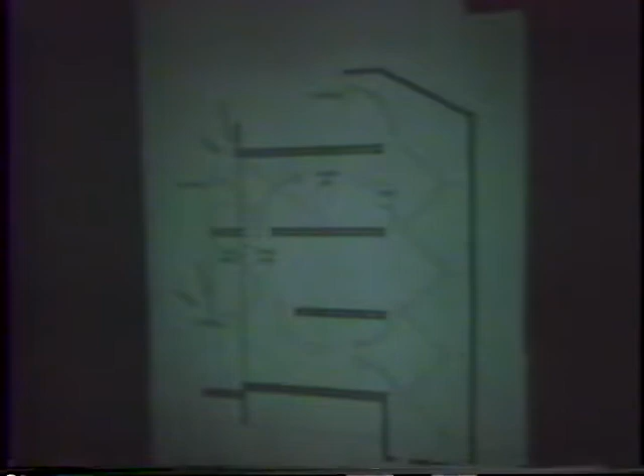This is where you can look out through the second level of glass. But in analysis later, we realized that we had actually created a pretty good heat trap, that the wind would blow actually on this face. You would get less heat loss at this point. We were still protecting from summer. We were letting some winter in.

It was a high volume area. It also had a loft that was not used that often. It was one for their sons when they came home. So I had extra high volume. And so what I started to find was that we had probably a good circulation pattern.

Also, there's a fair amount of radiation that takes place from the heat that stays up at these areas prior to the great change in temperature. There's also a convection current that starts to work usually down the glass face later in the evening.

So when it changes, we added the element of rock storage with the idea that actually that wasn't really in there, but with the attitude that if you took the process, you could bring the heated air down. You could also store it and bring it back later. The cooling process, of course, would happen by just the chimney effect of allowing the heat out on a very hot day. So without consciously doing it, in many ways, I think we had designed a very energy efficient place.

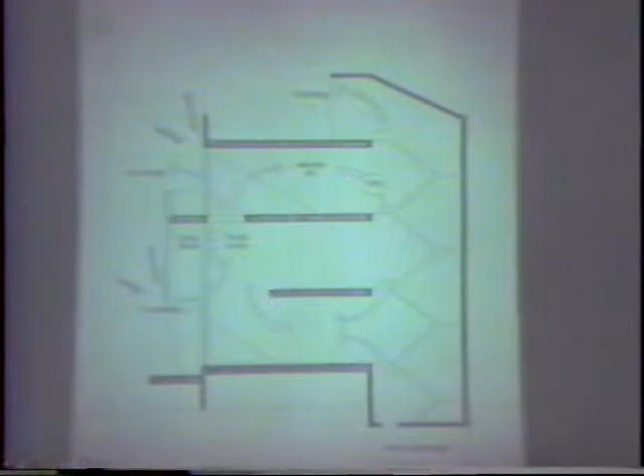Again, on this job, when I say we, Claudio Boccato was the architect who followed through and through supervision and worked to some degree on design on it. I don't remember who else in the office did. I think we two were the only ones on this particular job.

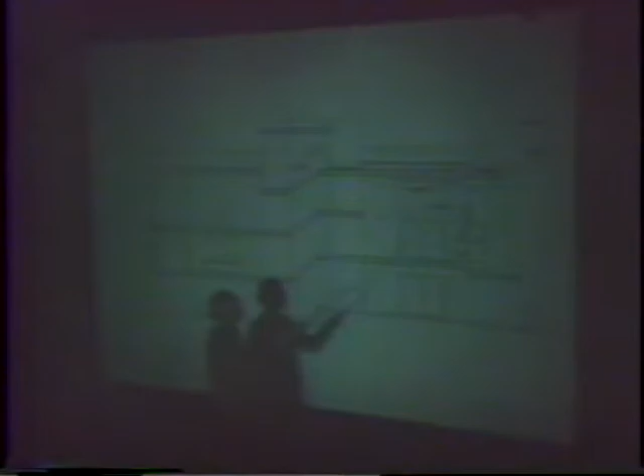So then I'm showing this section. This was another house, the stone house, that was very effective heat-wise. And what it did was what I was explaining before. There was enough overhang to cut out the summer, it let winter sun in. Because of high volume, the heat stays up top, so there's still a comfort zone in the lower area. And there's a lot of heat that's gathered at the ceiling, and that radiates later in the night.

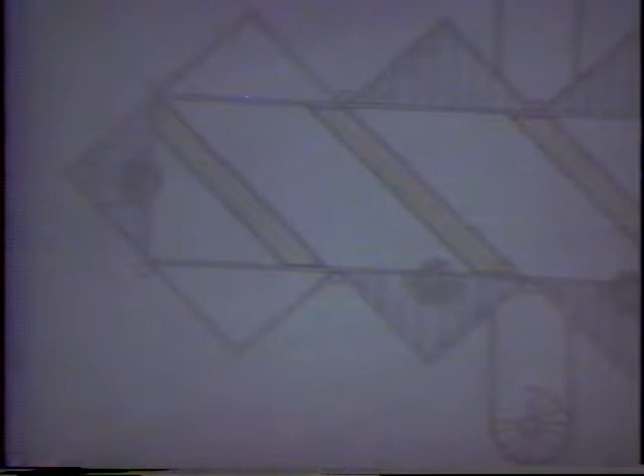Sun was coming 45 degrees south to this area, so the solar collectors are tilted, and greenhouses were added to the side. I'll show you further; in concept it would be this. This is the sun location. These are greenhouse areas, and these are solar collectors.

Now this client wanted fireplaces practically in every room, and this would, again, be good from an energy standpoint as far as burning and so forth. I needed mass in the greenhouses, so in this case I used a water mass filled fireplace. In other words, I used a metal container with water in it and used that method of collecting my heat mass that would then generate into the house later.

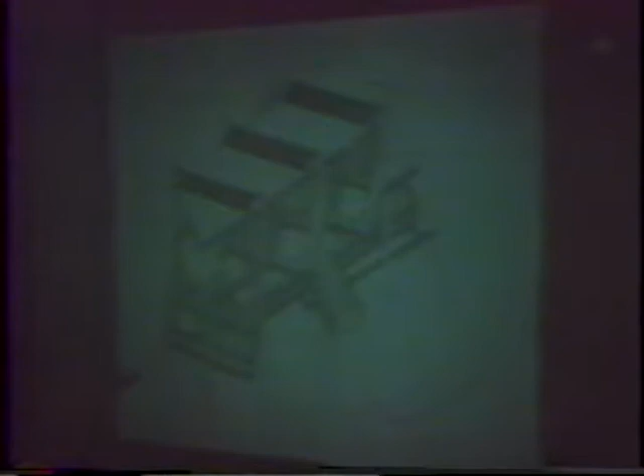The yellow circle over there was another one in which we were collecting the heat from the solar collectors and storing it in that container and then bringing it back in afterwards. In isometric, you can get a better idea of how the house works. And then as an energy use, this explains what I just explained again, the sun coming into the fireplaces, methods of closing the greenhouse areas afterwards, and heat moving through.

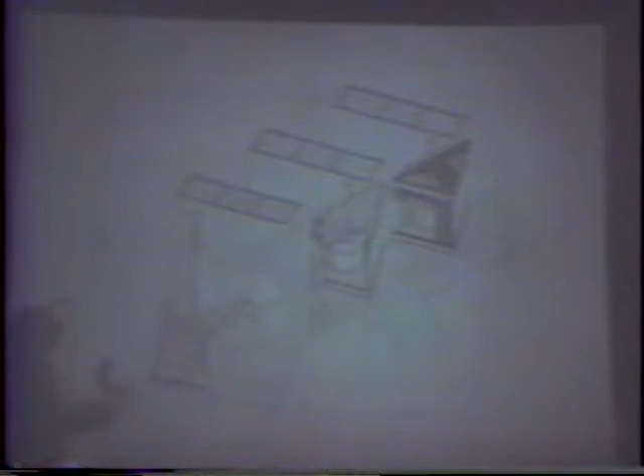So again, it's a fully glass house. It's not much different than many of the things that I had done before. The north side, this is again in model the same thing. We used a dark container for the areas that would collect in the water storage in the fireplace areas, and a yellow for the one that was working the other way. And all the north side was pretty much solid and closed. So it's opened up to the south and to the southwest and closed to the north.

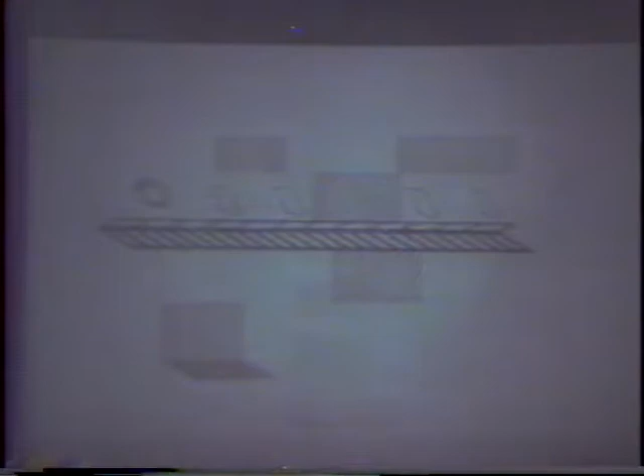Solar collector along here, storage here, and a series of, in a sense, greenhouse areas. In this case, it was using floor mass, which was tile in most of those areas. Further diagram showing various kinds of closure systems as well.

Another house. In all these last few houses, the one before and this one, Manuel de la Iglesia worked with me and did many of the drawings and some of the models for my presentation over in the gallery.

This one was an interesting one from a standpoint of client need, and in all cases I always feel wrong when I present, because I forget about the fact that in each case naturally the client's needs, the site needs, the kinds of space perception, all of these things are key factors. Structure is still an important thing to me, and so are all of the other systems.

So my method of design is always a composite of all of these things as well as I can do them. And I don't deal too much with just formal issues in the sense that they're being used today. You can still say that certain diagrams, certain patterns are certainly formalistic in their ways and their geometries, but they don't deal so much with elevation as they deal with plan, section and systems.

This one, the client wanted a house that when they were away could be used in one section, and when they were there, they could use the back section. So actually there are, in this one, two circulation patterns. One that takes you up through here for this part of the house that they were going to lease out. The other was just a system for their back part of the house over here for their bedroom when they were there.

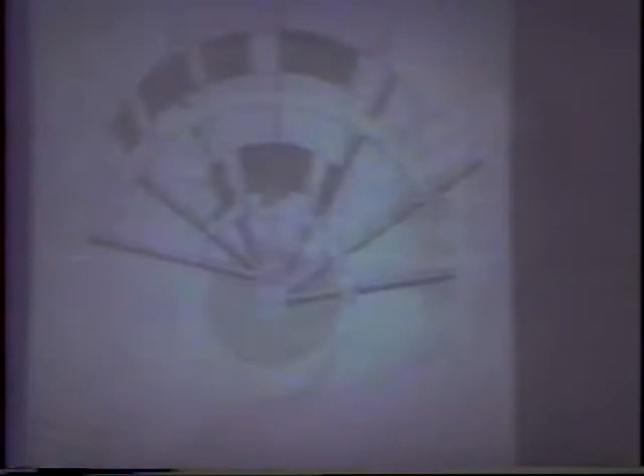And then this is a diagram of that system that I just expressed.

Is that focused well enough? That looks a little off.

But then again, this is just showing the working parts, the collecting parts, coming into this place, heating water and holding this, gathering sun, and then distributing back through the house, through the structural system and mechanical system combined.

Now, in many of these cases, like in this one, which didn't go any further than design phase, much of this was not worked out beyond this. So this would be a concept for an idea that may or may not work totally.

Usually, whether it be a structural concept you have, or a mechanical concept, or a solar attitude, or an energy attitude, the architect's role, in my mind, is usually to project ideas or attitudes that can be used, and the engineer or the consultant's role is to make those things work for you or tell you where you're wrong, have you go through the adjustments that take place.

But if you don't project first, it's a rare engineer, although we have one sitting in here tonight, Saul Golden, who will give you something before you ask for it. Usually you have to project things first.

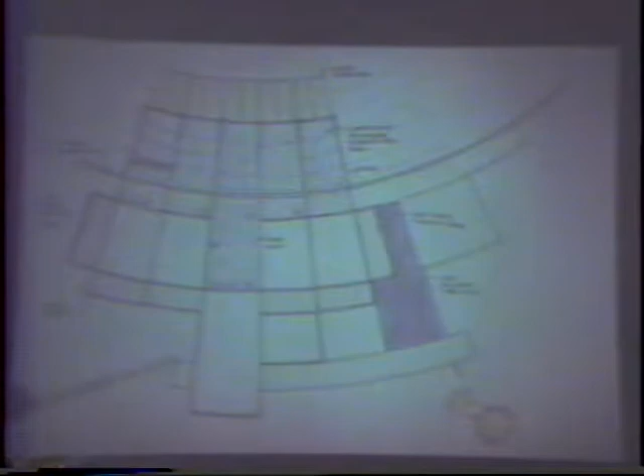Another one that we're working on will be going into construction soon. The one prior to the one I just showed will also be in construction soon. We've been held up with a geological problem for quite a while. This one should start quite soon. This was interesting because if you can follow the contour lines, this hill took exactly this form.

And normally in an area like this, it's a rocky kind of a mountain slope. And when I saw that, it seemed to me that it would be nice to be able to use that for the mass, if I could close it with a greenhouse enclosure. The problem that you normally have in something like this is the city wants you to stay away from the toe of the slope by X number of feet, or develop a retaining wall if you're pushing back tighter.

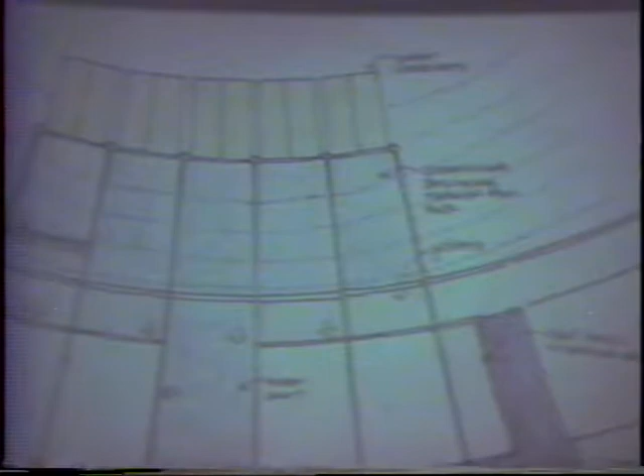Along with what I wanted to do, I also worked out a system that would allow me to cover the hill and get away with going all the way back to the top of my slope. So in a sense, by just having thought about how I would deal with the energy issue, I was able to gain a much better situation as far as the way it would work with the slope, and not have to give up that back part of the site. There's a view site to the ocean that moves out from there.

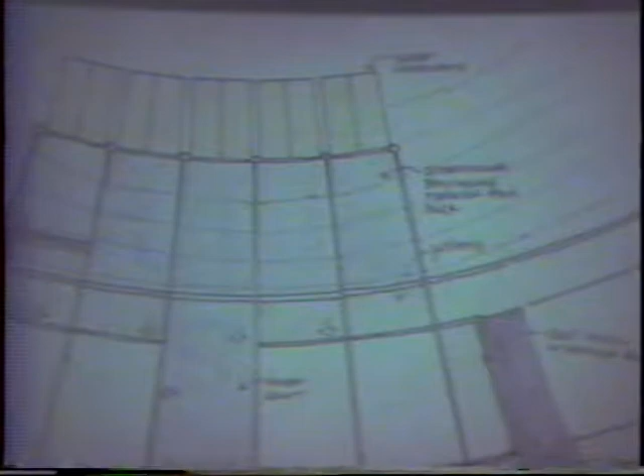So again, the energy proposition here is collecting at this point using a galleria that's closed off, and then at night opening the doors and letting the heat penetrate from the closure here, then going back and closing the greenhouse later. Out here there's a series of trellises for east sun and south sun and so forth that will help protect from south sun. So that's that diagram.

I don't know if this one reads, is that too light? It's difficult, but again, this is the system, the greenhouse system, the heat shown coming into the house, and that whole process. And then a solar collecting bank up at the very top of the hill, which goes right up to the property line.

This is that sloping bank. Actually, what we did in this one is we're setting piling, and then we're spanning between with a little wall that creates the wall at the back part of the site rather than down at the bottom of the site.

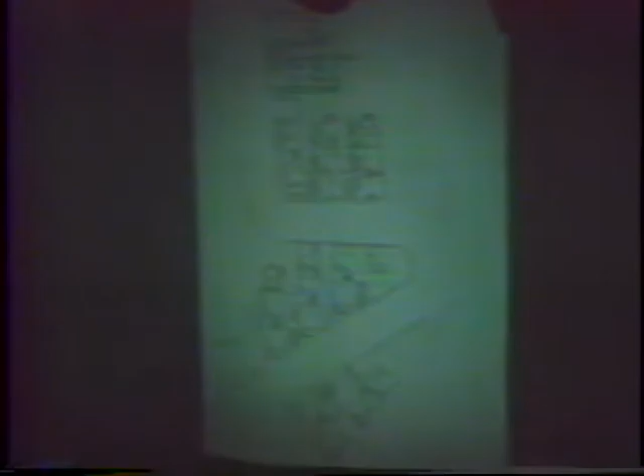Another interesting problem we had that, again, didn't finally go ahead because of the city changing their restriction on the street width later, that made the site almost impossible to deal with. It was in the Beverly Glen area. And Beverly Glen years ago was cut up into very tight little lots, about 30 feet wide by 90 to maybe 100 feet in depth, sometimes a little bit more.

And when we got into this particular problem, our option obviously would have been to collect it and do housing with joined walls and so forth. But in order to do that, one would have to go through a whole planning commission development and get an okay through that process. And we decided that we would just use the sites as they were and see what we could do with that.

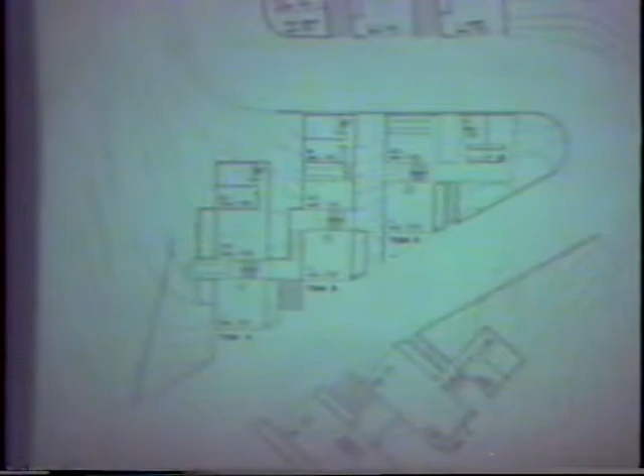And of course, they were oriented in a whole series of different ways, and I didn't have the option that we normally had on many of the sites to make turns and twists that could get me to the south sun in a special way.

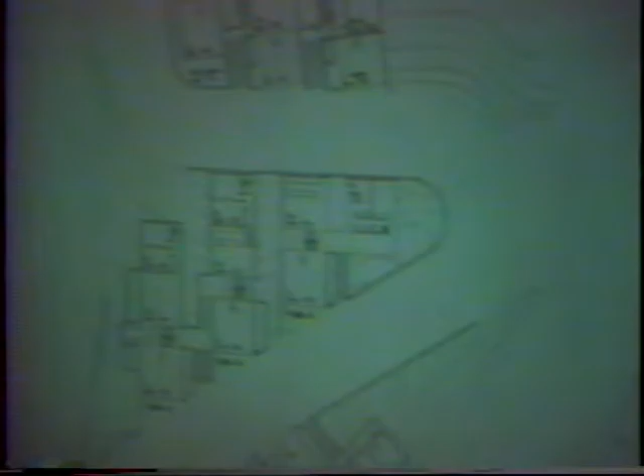So in this project, Bob Locke, who's here tonight, worked a great deal on this, and Manuel also. We decided to, one, just develop a series of very simple structural boxes that would fit on these particular sites and work in a vertical sense, and they would fill the site as shown in this model form.

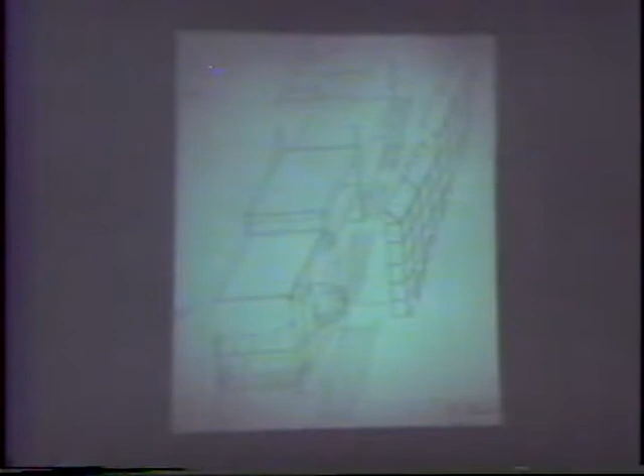And then we devised a system where we would actually add components, and the components would be added in a fashion for sun control, for allowing sun insolation, sun protection, etc. So there's a series of screens, awnings, overhangs, glass-walled attachments, and so forth. And this way we could actually dress each unit as we had to make it work energy-wise. In some cases it would be awnings. If we didn't have enough room on the side yard, we would use a tight-fitting system and so forth.

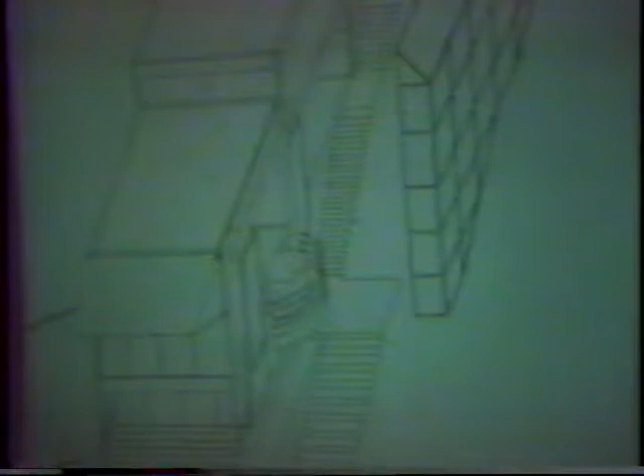So again, we didn't get a chance to really go through it, but I think the process was an interesting one, which was dealing with the idea of privacy, at the same time getting the best, most efficient energy usage that we could develop. And that project, we'll probably try to use that again at another point in time if we had a similar situation.

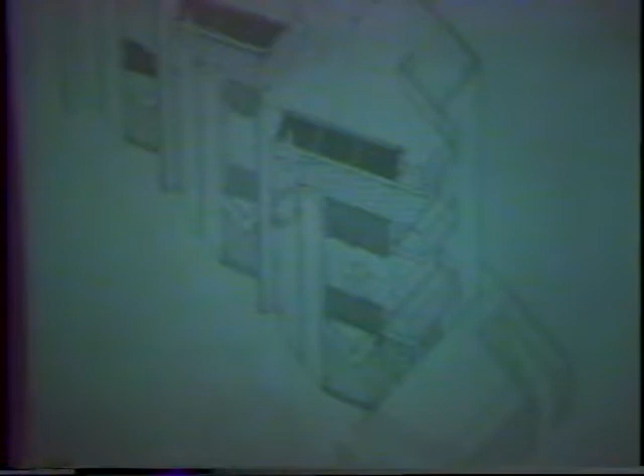Another project that is still in the works is a 3-unit condominium down in Venice. And again, this one was dealt with in a way where it was twisted in order to gain south sun. It also went with the alley in this face.

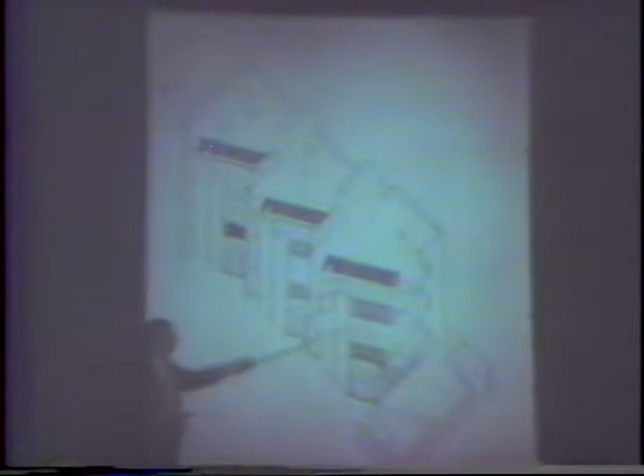And as it went up in section, what I decided to try to do on this one, since it was down at the beach, was to hang over the railings a water-filled, what would you call it? These plastic rafts that you use in the water, and just hang those for color, keep the water, and use it as a system of lighter weight mass. So again, this was a set of ideas that still haven't been tested, whether they'll work or won't work. And again, these are the forms that come out of that.

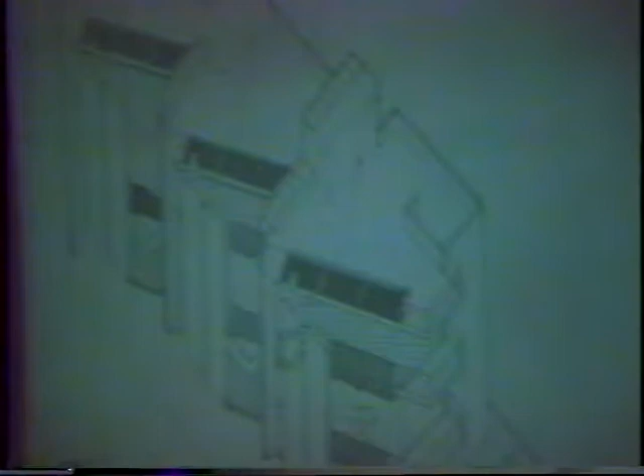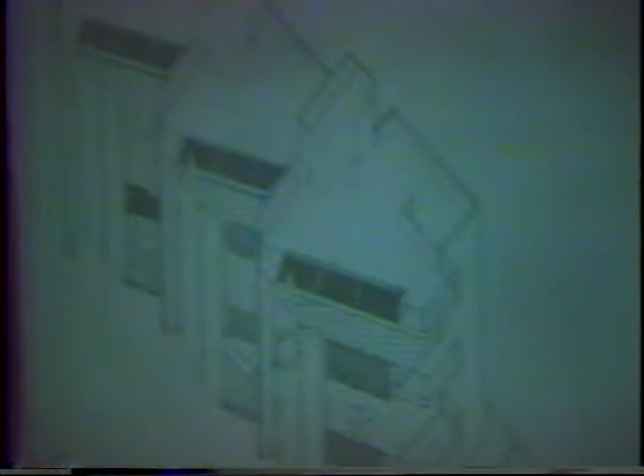In this one, the views were very tight, and so some of the pulling around the corners and in these areas was to get specific views out. This front corner had a view through, but it was on the other side of the speedway, and all the sites are rather specific. Again, most of my owners always want maximum glass. That's, I guess, what I'm known for, and so whatever project I get, nobody ever comes and says, give me a closed-up house. They're always looking for maximization of glass area.

A different kind of a problem, that we also have to face periodically in energy response, are those that are really the non-house, or the ones that are subgrade or semi-subgrade, where you back your north side into the hill, quite often cover surfaces with a turf afterwards, and kind of minimize some of your openings. This was a project for Charmlee, which is a county park, and it's been so long ago that we did it, I forget what we called it. It's a little building for people to come in and look at the various natural aspects of the park that are on display. Little nature building.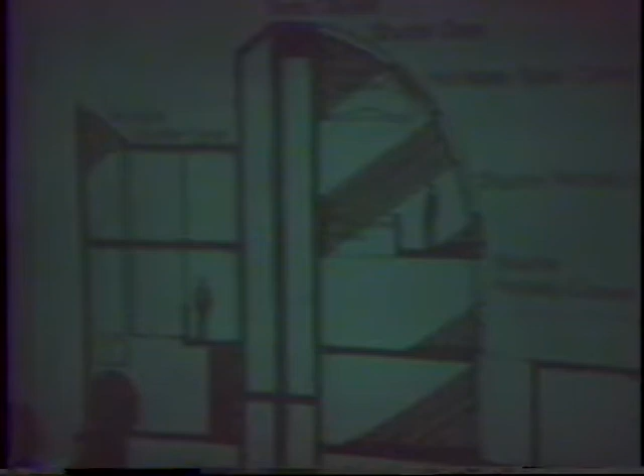So the idea here was, again, solar collecting at this point, allowing the sun to come in against the wall at this point. I show people here to show that what we're attempting to do is we would protect the system from this point, allowing the sun into here, so that at no time are you really into this whole hot area. I'm very concerned always about low spaces where there's a lot of sun gain. So if you use a lot of glass, I always feel that you have to give a lot of volume so that you don't have the sun on top of your head.

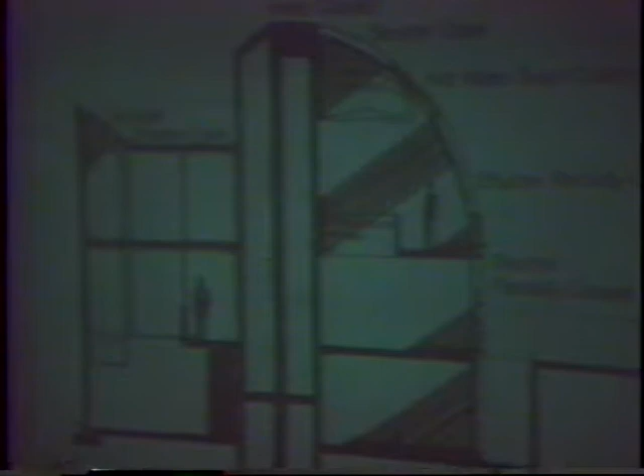So anyway, that's the system, the shutter system up, the shutter system down, and this heat process that comes down in here and then recirculates later, and this later in the evening throws off its heat. So again, one of the problems that I'm having after all these years is that none of these jobs are really up to be tested, and the difficulty is that when you're dealing with things as I do empirically with general principles, you don't know for sure if they're going to work until you've had a chance to see what happens. You don't really know whether what you're trying to do makes as much sense as you might think it should. Particularly when we looked at houses earlier where the concerns were not these concerns primarily, and we were getting fairly decent results. So the hope would be that these would be successful in terms of what one was trying to do with them.

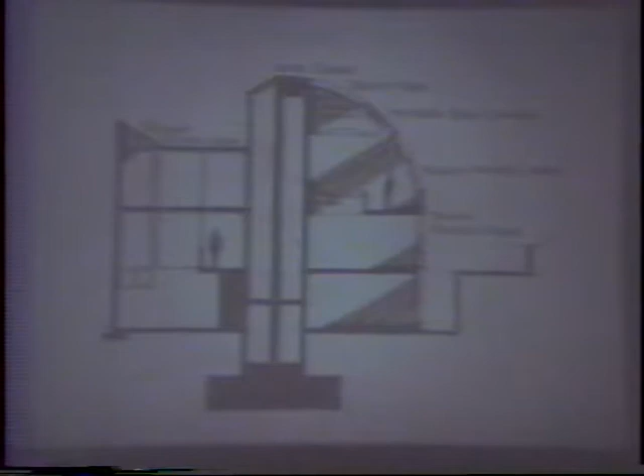The house as it stands from the back side. And the total shot again. Again, still working with sites somewhat dug in. On the Bourget house that I showed you before, part of it is dug in, a lot of it is exposed. This is a site down in Santa Barbara that's a 45-degree sloping site.

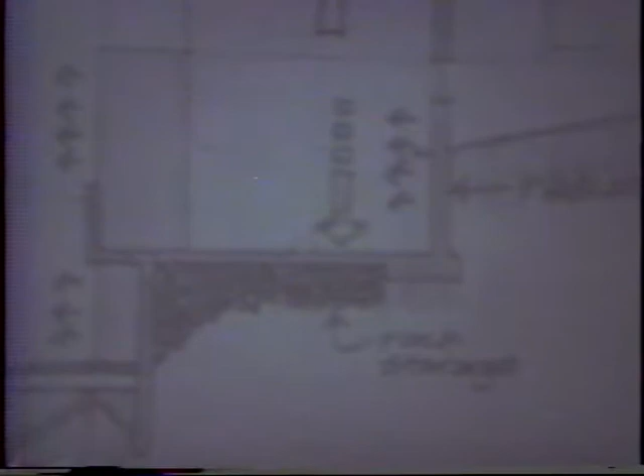And in this case, again, I decided to use some of the existing hill, which is rocky, some water storage in this sense, make a greenhouse out of this bottom section, use the same kind of roll-up and roll-down devices that I was talking about before, once you collect in here to close this space off, a system of generating the hot air afterwards, a rollback awning process to protect this face or let the sun in, whichever we want to do. Everything in the purple color always in these drawings is the mass part, some rock storage at this point.

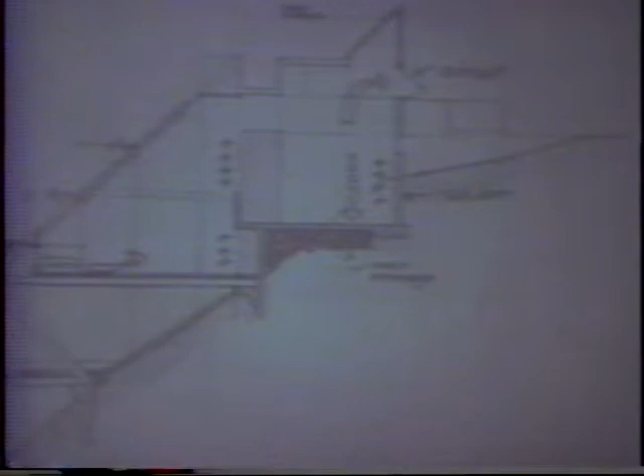So I'm showing the heat coming off the mass, showing this heat moving up through this portion of the house. Again, we're going to try to collect up at the top and pull that down into rock storage in this area. Solar collecting up at the top, exhausting up at the top, and fairly much the same principle as before. The house is somewhat designed as a truss on this face, which I'll show you later, with a concrete portion to sort of stabilize it at the back end. Again, a combination of a structural system, a volumetric system, and a heating energy process. It's on a south-facing slope.

So this again shows you the greenhouse, the house as it exists up at the plan above, the mass points that I was showing earlier, and also the way it addresses the site, which is I have to come in from the top side, swing around through this to get to the garage area. So I spun it off to get in from that point.

I still wanted to face south on my major facing view side and energy side, so the house takes its moves that way. Again, I prefer these kinds of turns and moves when they're meaningful, rather than just as an attitude of change for change's sake. Not that that doesn't work quite often the other way very well and gives you those forms. I just, for some reason, usually need a reason to make my moves. I enjoy doing it that way more. It seems more meaningful to me through that process.

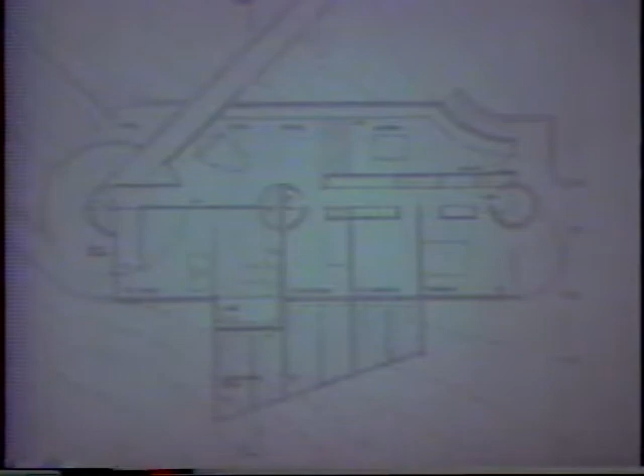So the sketch of the house. This house, the owners are going to build themselves starting this summer, so it was designed quite a while ago, but it's just going to get into construction. He's a retired junior college teacher, and I guess he's going to want to spend the rest of his life building a house.

But they're wonderful people, wonderful clients. Most of my clients, I feel, are wonderful people. They're very, they're great.

On this house, again, the north side and the northwest side are fairly much closed, and the south side is the open side. What I was saying, the mass, this part is the mass holding the house, and then that truss playing off of that form. Also kept this one below the top of the hill.

I had designed a house for another friend of theirs nearby, and we put it on the crest, and I didn't realize how windy the area was, and they had a fair amount of problems with the wind coming from the canyon on that side. I assumed, because we were facing to the ocean, that the winds would be gusting up from below, but instead they actually gust from behind.

And so some of the considerations here that I'm still a little concerned about in talking with the engineer is the kind of negative pressure that'll be built up on the glass face because of the wind coming up over the top and developing that pressure. Their feeling on it, however, is that when you're designing for your positive wind pressure, your negative won't be any worse, so that it should work okay.

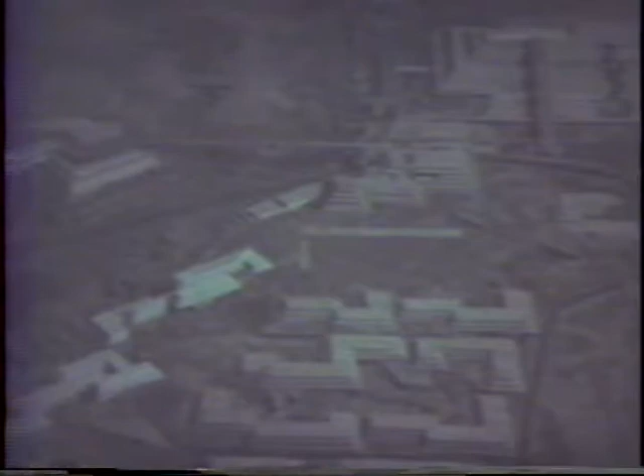Then just in terms of a larger scale project, and this one dates back to the early 70s, but it was sort of interesting to me as I've looked through some of the things we've done over the years. This was a new town during the days when new towns were very much in, and people were attempting to design new places for larger numbers of people. This one was actually a small one for about 10,000 people, and it was actually connected to a company. It was somewhat of a company town, a research city, and there's some research area that goes off beyond this.

But what was interesting to me in the design was that on the downs, we actually had chosen all the south downslopes, and most of these back areas are all, again, dug in with the car parking really behind and the apartments out forward, or the housing out forward. And the circulation spaces are these units right that come down through it perpendicular.

And the interesting thing to me was that in a unit of this size, in order to make it self-sufficient, probably the same kind of systems that I was using on smaller houses now, of using circulation, which was south-facing, for photovoltaics or for solar panels, would probably collect most of the energy. There's water down in here. I guess we could do a certain amount of storing using it as well. We were damming at that time, more for visual purposes, but it could have other advantages.

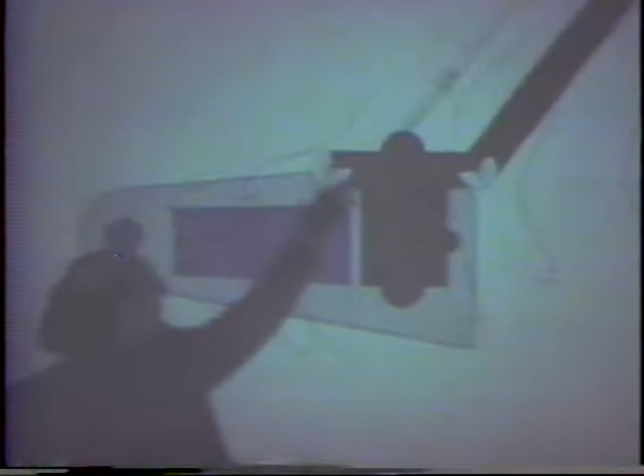Now move on with, again, another kind of a group that's somewhat different from the others. This one is a project that I worked on with Dean Noda primarily in the office. This job was on a very, very rough site. There's actually a valley that breaks through the site through here.

The point right up at the top is the only place where it addresses the street, and that's the car parking area. There's a bridging over this area. The master bedroom suite is down here, bridged away from the living and kitchen and dining portion up at the top. That's the plan arrangement.

This shows some of the energy considerations and why some of the twists and the turns. I start out addressing the street, and that's the parking area. Then, in this case, again, we used the knuckle system of the rounds, and took a turn on each of these stairwells in order to get the south-facing view. The view's out this way, and also the sun to the solar panels. So this one takes a twist.

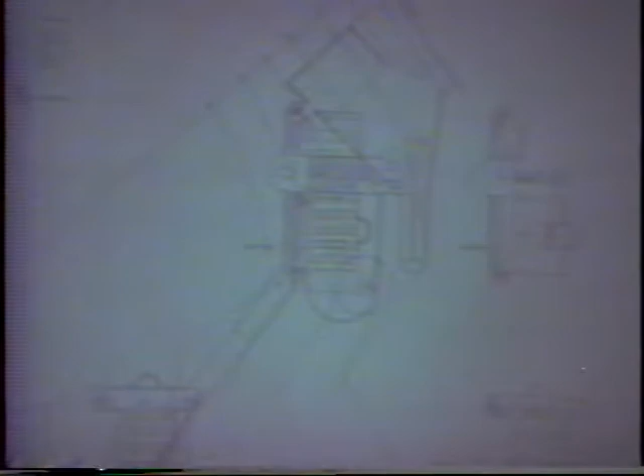Then we take another turn to move across the site over the valley, and then come into another knoll on this side, which again, we take the turn to the south side for this unit. So the whole system moves through in this kind of a fashion. Also, there's so many stairs to walk up in this place that they don't have to jog very far. They just run around the house all day.

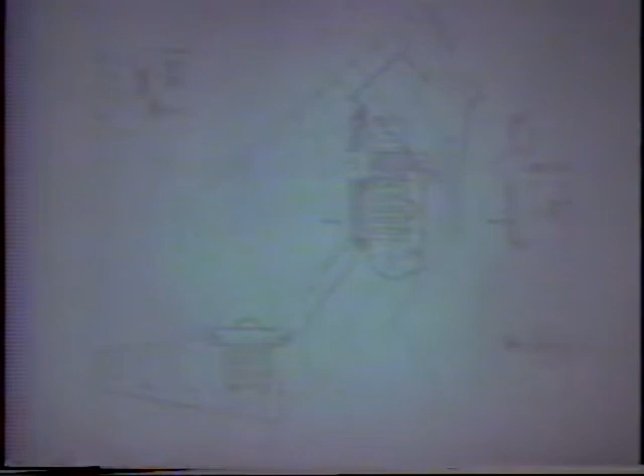But it's a very involved place to come from your master bedroom up to get the morning paper. But I always feel that's a rather nice experience, and since most people today who are fairly affluent spend so much time worrying about their health, probably the house can be a health unit just by making them move in there instead of coming home and laying down after they've run around for most of the day.

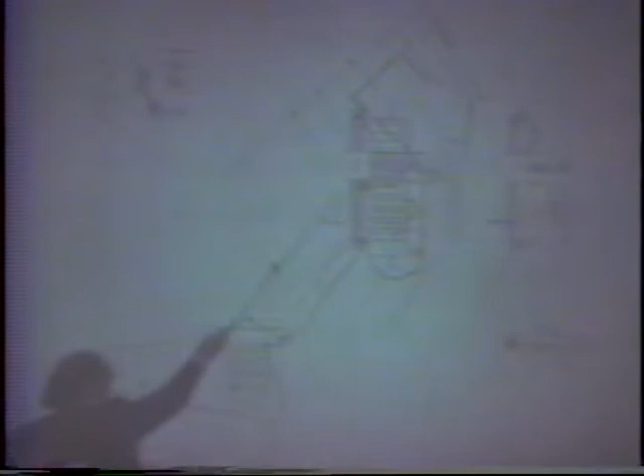Anyway, the process here is a heat trapping system that works on, in this case, the west face that gets the later afternoon sun. This one was to be closed off from both sides. As you see here, I think I have another shot of this, but I forget. It's a roll-down system that protects it when you want it protected on the outside face to keep the heat from going out, and on the inside face from coming into the house when you don't want it. And so later in the evening when it gets cool, you open this side up, let the heat in, and you roll it down on the outside.

The house as it was designed was this way. It actually wasn't built this way, but in concept, I still like to show it this way better. It was meant to be lighter and more of a bridge house in steel and with really metal skins that could have been applied in a much simpler fashion.

The house, as many of you know, was built in wood, and it was much heavier and not, in my opinion, as interesting in terms of the perception of movement through it and some of the other aspects of it. And of course, it was put together really well by Claudio Boccato, who supervised it, along with Dean, who had supervised it earlier, and worked it over very, very well.

But still, I always enjoyed the earlier concept, which was a lighter one in which we were also expressing our solar collectors, in a way that the ceiling would be a combination of the collector and the north light. And also a little more openness in the bridging wing that was to be an art gallery. So I always kind of liked it better in this level.

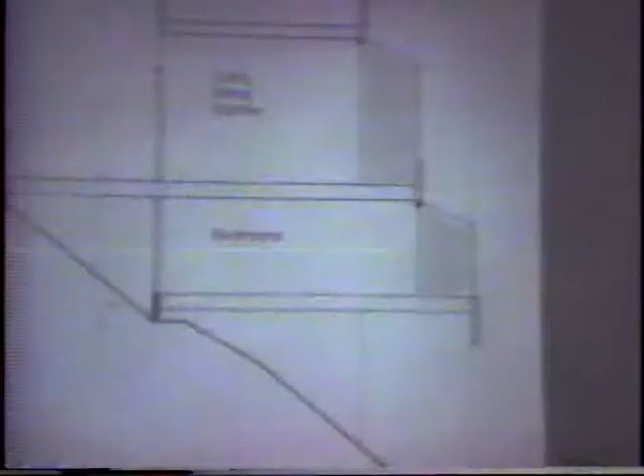These were the structural elements, not just glass surround. We didn't show the internal parts that were holding it, and they later were changed to wood as well. But still, I found the process of the house an interesting one, and spatially it's interesting. I just wish it could have felt lighter to the hill than it does. I feel it's heavier now. And there's that diagram again of the roll-down system, and then the heat lock system.

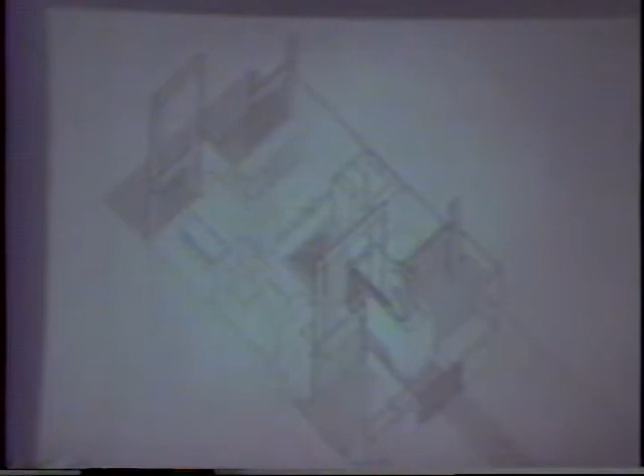Another house that many of you know, this is the Friedman House in Santa Monica, and this house again had an attitude originally of wanting to work with a center court and a solar collecting system up above, which I'll show you in other diagrams. And then, of course, this steel exposed system came later.

This house, Tom Foe worked on with me, and Rex Luttery supervised it most of the way, and I ended up supervising the end of it.

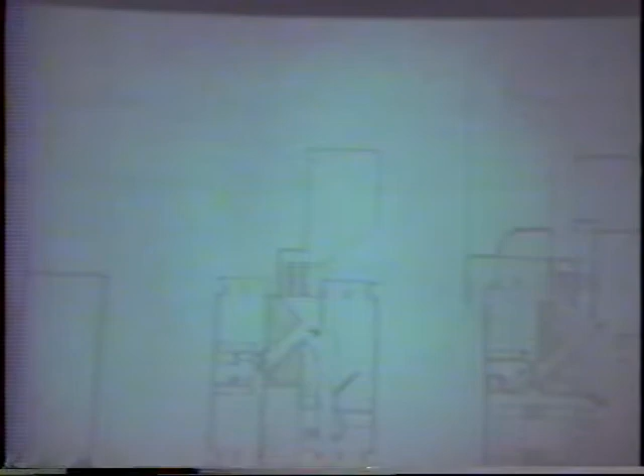Originally the concept was a combination of collector in this part over the garden with intervening glass areas that would drop down into this area of the garden, and the purple is showing some mass collecting. In the initial concept that I had, I thought I would probably close this as an inner garden and then allow it to open in the later day and let the heat in through the process that's shown there. So it's really just an internal courthouse.

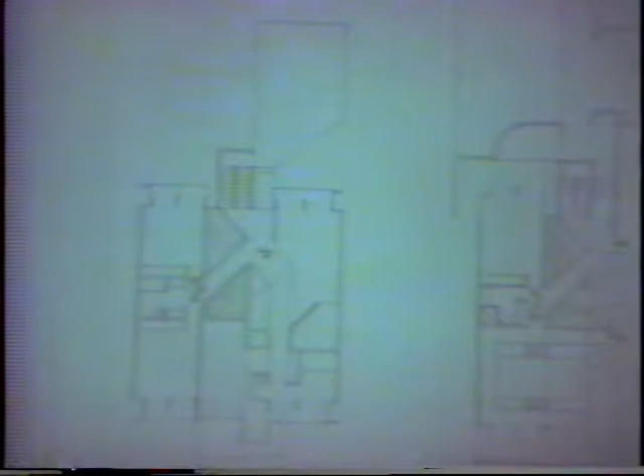What happened later, originally when I had thought about it, of course we were getting south sun here, so again it's one of these 45-degree turns for the sun. My thought at the time, we had a stairwell mass here, was that I would shade a certain amount of south sun. Later, as we got into it with the engineer on this and so forth, he felt we were shading too much during the wintertime, and our collectors wouldn't be as effective as they should be.

And so we dropped the collector at this point, which I wasn't too thrilled about, but we went along with. We moved the collector just up onto the roof in a normal process and opened this up as a skylight totally. Again, conceptually, I still personally like this move first. Again, with this 45 turn, the bridging and the movement and the circulation through this house also took the same 45 turn with the room above.

Again, this was something that I normally don't do, and probably would have run around this thing a lot more. But then as I started to look at it, the amount of wasted space that we'd have to cut out of these rooms in order to use a normal galleria made a lot more sense to turn the 45.

And again, this was interesting to me later because as I said, I don't do that much internally, and that one move I feel set the house in pretty good motion. And I think today so often people do so many moves, and I think it's not necessary to make that many. And here I found that one did it really quite well.

Again, that last shot was showing the internal garden, and we used in the planting here avocado trees and citrus trees to kind of give it a special internal quality rather than normal planting that people use. You can see the way the skylight is now. But this house has worked pretty well. Of course, it works from solar, but at the same time, the skylight does pick up pretty good heat. It has good volume, and the house heats up pretty well in the daytime without a lot of added heating.

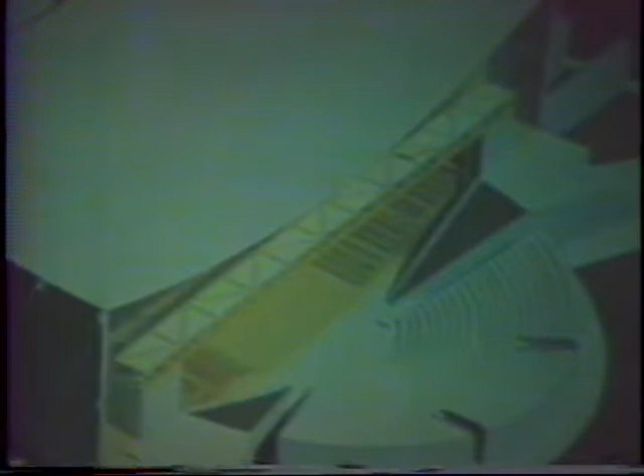We went through the process of studying all the various structural systems we could use over the kind of span we had. We looked at it in many ways for energy attitudes. We had an existing gym to interrelate with, and what the best kind of connection was and how to use that connection. It was a gymnasium in which we opened up the whole end, and I'll go into that in a few minutes explaining some of the energy stuff. Didn't feel like we were forcing every issue. We tried to make the best decision we can make.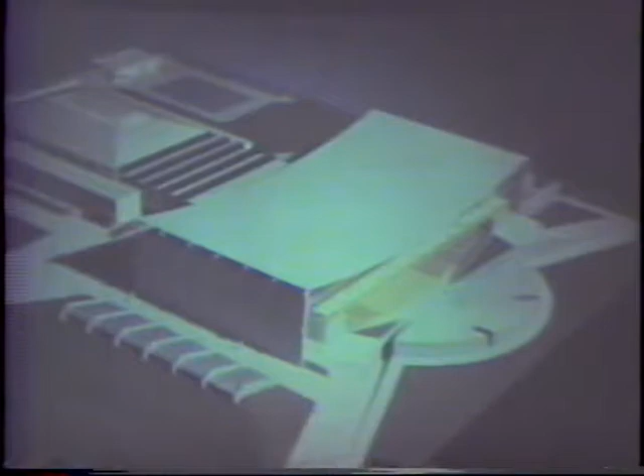The element over on this side actually is both a weighting system for the support system for the cable roof, and at the same time it takes the winds from the ocean through the building in order to cool it, along with the wall on this end that opens up for cooling purposes. We didn't want to air condition this gymnasium, and so we were trying to use the air scoop process.

We do this on a lot of jobs, but this one, because it was larger scale, we had a whole series of considerations that we drew up at that time. Our office was never known for overdrawing things, so sometimes presentations are a little light when it comes to the kind of material that one wants to give.

Anyway, this is showing the use of the prevailing wind for cooling. We're talking about storing stormwater for irrigation. We're looking at natural lighting on a couple of spots, the solar collection process, the hot water storage, etc. So those were some of the considerations. In section, this is again the scoop that works and how the space ventilates and cools and heats and so forth.

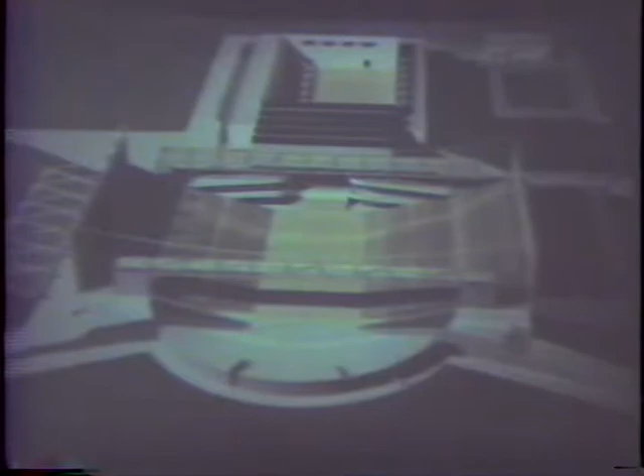And again, the close-up of the air scoop and the tie-down, a shot through it, showing how it would work for other than basketball games, where it would open up totally for auditorium. A truss system here, just a full span, so we could open up that whole full side. And then a solar panel system on the juncture the other way.

And then, instead of dealing with the old gymnasium and trying to repeat it, we took what we felt was a nicer move, where we were counter-moving to the original bowstring truss system, I think, or lamella roof system, I forget which it was. So we were actually in context working opposite from the system that was already there.

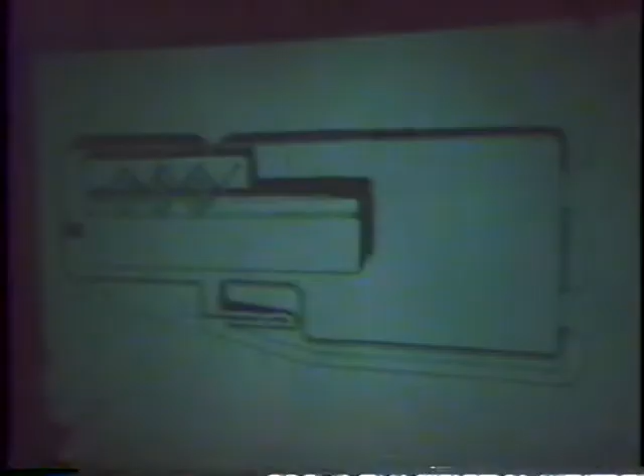I think this is the last job I'm going to show. This is the Santa Monica Bus Administration Building. Again, worked on with Dean Noda and Rex Lotery, Dean actually being responsible for carrying the project through the last stages, and I think it's bidding now, and hopefully it'll come in and it'll work.

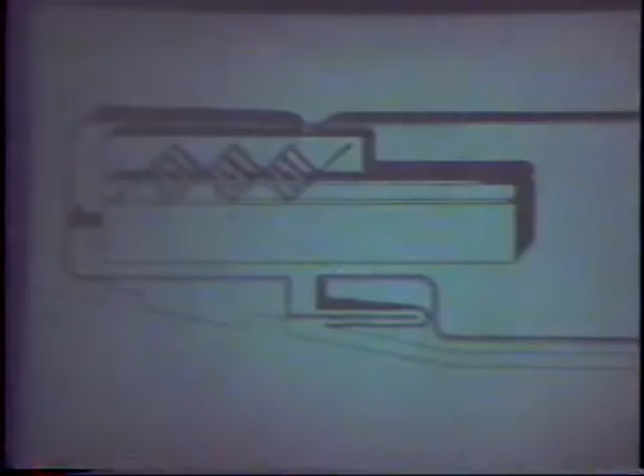But this again is orientation-wise, this is the site. Building again placed on normal access to the bus storage area on the side. The truss system working 45 degrees to that. In Santa Monica, the grid is 45 degrees off the sun axis. So throughout that whole area, and usually through Venice, and most of these areas, there's always that 45-degree turn that one should deal with or can deal with, which I find really an asset.

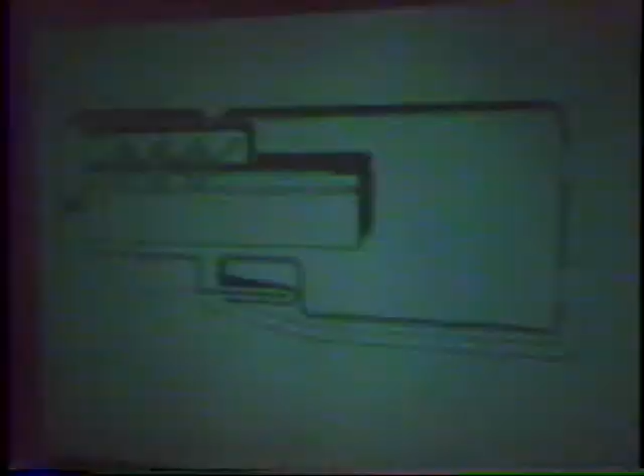And I guess what I'm really saying is quite often by looking at energy considerations, in my mind, things happen that are quite often more interesting and better than they would through the other process. So again, the concept in terms of energy and heating and cooling and so forth, and again, when you're into this kind of a building, cooling is more important than heating because of the heat load from the lighting and so forth.

Also, the heat you need is usually just in the morning a little bit, and then you want to develop some cool air. So I was using a scoop that came out of the side of the building, went into the heating area and into a plenum that is shown in purple, which works all around the building. The water system would work separately and store and heat through that process.

On the south side, you'll see the kind of system; I'll show you in section what we used. On the west side, one of the concepts as we were working on this was to allow it to really respond to each of its exposures. And really we would be doing probably more changes on the east face or on the west face than on the south and north face. Certain exposures didn't make that much difference. East and south kept somewhat the same.

West, we recessed the glass areas and the office areas below and used a fin for protection of those and a system. This whole area that's shown with glass is a bridging element that is used for daylighting purposes, which I'll show you in section, and also the facing side.

The attitude there also was to collect late afternoon sun. This is the only part of the building that's used in the evening. And what we thought we'd do is collect some afternoon heat there, actually put that into a plenum unit and also feed that in later at night. And that was the concept. In section then,

these areas that are shown in purple are those plenum areas that run all around the whole building. The daylighting process is used where you used a series of horizontal reflectors here and there. They were set up in a way that when you're standing you're viewing through that series, and when you're sitting down, you're viewing through this series. The reflection process works so that you're getting your light back as far as possible into the building.

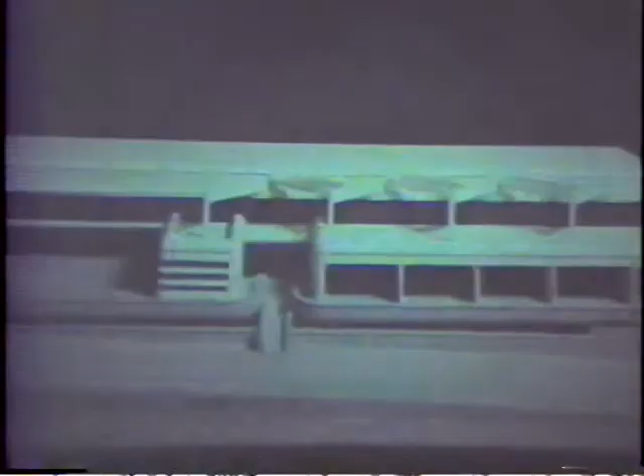Shown here, the solar collector up above, and the concept of the building. Looking at it from the west side, then the systems, the baffle process, the buses move out from. The east side is back to the system, and the north side is fairly much glazed. To me, one of the sad things about the building was that we had many more outdoor courts and terraces and things like that.

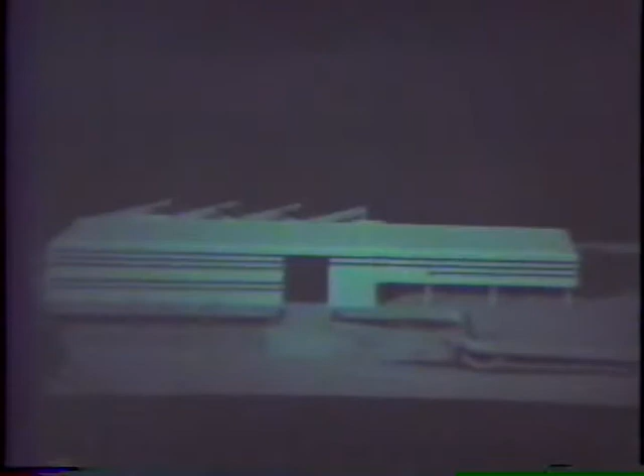And the administration people seemed to think the building would feel too good, I guess, so they tended to not want that; up under here we had a lot of open areas. Instead, they wanted more parking under there and so forth. But it took its form pretty much, or totally, really, from solar and daylighting. And of course, some of the aspects like the rounding of corners, the kind of skinning, were trying to give it somewhat of a bus image without being a bus. Thank you very much.